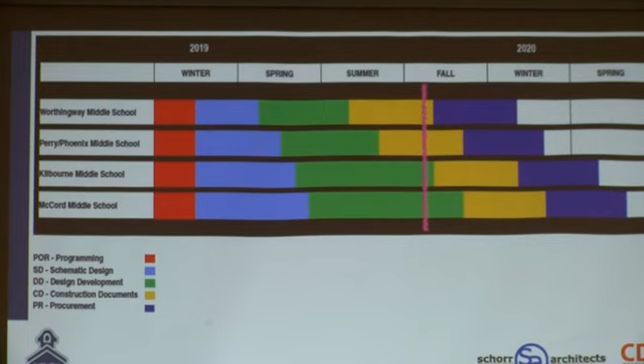We've talked about this slide before. The pink line keeps moving, and that's how things happen. As you see, we are just about to exit the documentation phase for Worthingway and get into starting to procure bid packages. Things that early are coming up would be earth moving, some fencing, some site organization, some structural steel and foundation work. That's all coming, and it's all part of where we are.

Yet we haven't even gotten to the construction document phase yet for Kilbourne and McCord. So we've stretched these 4 schools out because of their size, their scale. Everything will be done in the summer of 2021, but we're going to get them out of the gates separately. I think that's good for where the construction market is now. It's very busy, and it's very hard to get interested bidders, so as we put these out a little bit separately, I think that's a good thing.

I'm going to go backwards tonight with where we have the least amount of progress. That would be McCord, and then end with Worthingway, since we're here tonight and probably where the most questions and the most detail can be shared. So we'll go fast at the beginning, and we'll slow down and get into more details as we get into Perry Phoenix and Worthingway.

So McCord. Northernmost middle school, sits north of Kilbourne High School and south of which elementary? Somebody? Thank you, I knew I'd get it fast. So we have a pretty good site, we have pretty good space. Although when you get into the site plan, you start seeing where underground utilities are, you start seeing what happens to the grades and to drainage as you get into the woods. So we really wanted to use, for the most part, where we had open site.

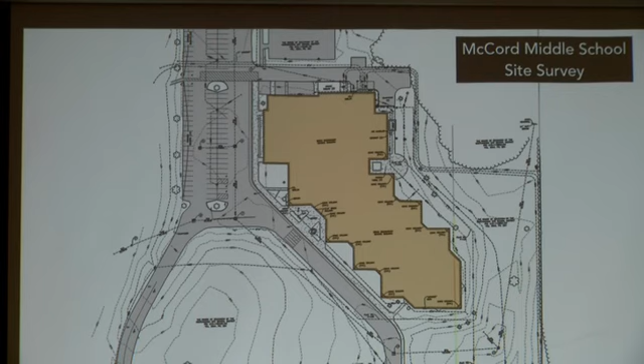Obviously, we have a lot of investment in our entry drive and our drop-off sidewalk, so our opportunities for additions were always in this kind of zone over here. We thought we might push into the woods, not being a big deal, but we found it was a pretty big deal. So we're staying away from the trees, staying in the open space, and trying to solve the geometry of how to put all this additional space onto a school.

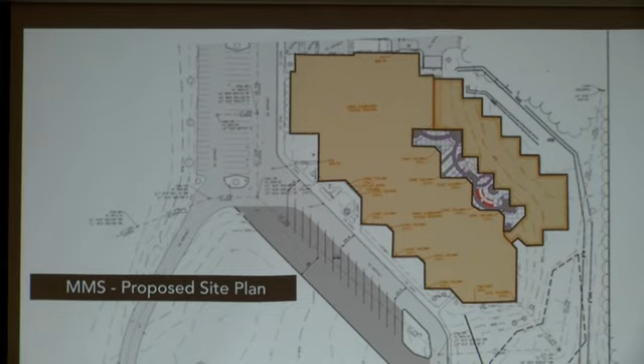So as we got into it, we ended up with a very sawtooth pattern for important reasons, which I'll get into. And we created what is probably the most unique part of this school, a large contained outdoor learning courtyard that's going to be contained by this new addition. As you can see how it sits on the existing school.

We are also looking at site improvements, not necessarily part of the original scope, but something we might be taking alternates on to look at ways to improve site circulation. So here we're showing some angled bus parking, so instead of lining the buses up one-on-one starting here and ending up there by Granby, we have the ability to maybe stack them with a little additional site work and make it more direct access to the school, and possibly give parents a little bit of access to the curb and pick up, which they don't have today.

So here's how the building lays out programmatically. You see a lot of new science labs, a lot of new classrooms. We created this new courtyard, and we displaced music because of our desire and necessity to expand our student dining, and it's part of the beginning of that new addition. There's about a 20,000 square foot addition here, about 12 new classrooms. We're going to take old science labs and grab them back for different kinds of special needs classrooms.

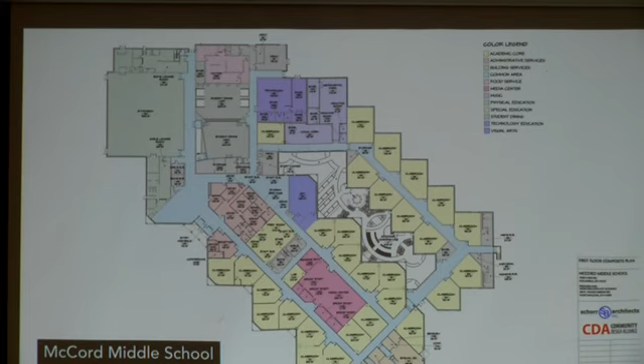We're going to capture all the music space next to the cafeteria and create a much larger dining room because we need it for the number of students we'll be housing. Then we're going to reprogram some music spaces and add a new large group music space here that replaces what we've lost. Here's our new office area that is secure entry.

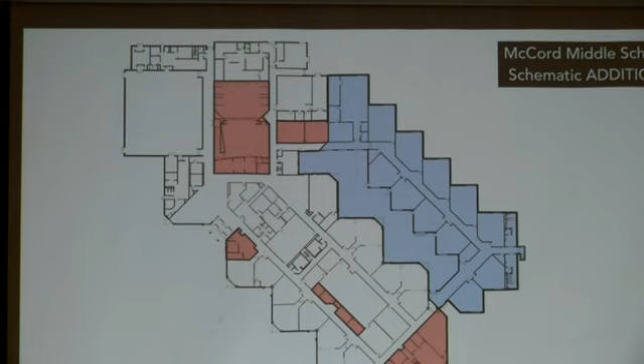People come into the first door of the vestibule, they come straight into the office. They don't get past the second door of the vestibule during school hours. And then we're creating some small group learning collaboration spaces, which this school in particular lacks, and something we're trying to accomplish at most all of the middle school renovations and additions. And then the old science labs at the end of the building, we're going to capture for some new special needs space, which is also lacking. The larger spaces and the reconverted science labs are going to help us do that.

So what's left after we do the basics? This school wasn't very hard of a challenge in terms of the program. It was a fairly hard challenge in terms of where do we put the program, how do we orient this, how do we connect the pathways in the school back to each other. The idea that we would grow on the end of the wing and just make a much longer path to travel from the center core of the building out to the end was non-negotiable.

So the idea of a loop actually came from the superintendent saying, how can we get the traffic patterns to connect to the end of the building, but also connect back to the core of the building? And this is what happened. I was a little nervous about the idea of a courtyard. It's something that has to be maintained, something that has to be designed. But the teachers and students in the school got very excited about the opportunities for outdoor learning and just outdoor space. It's contained, it will be safe, it will not be subject to vandalism because it's completely surrounded by a secure school. And today with camera technology, we can even see something that might arbitrarily happen out there.

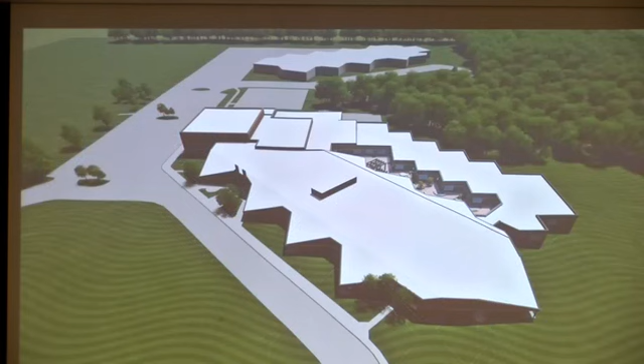So here's how the new massing of the building will look. From the outside, not very exciting, although the sawtooth patterns you got used to seeing are still there. This is where it gets kind of exciting, where the old and new create this zigzag courtyard, with the ability to create teaching stations or teaching areas here, and then something else next.

It's small spaces that connect in a tissue pattern and also connect to classrooms on either side of the courtyard. So at eye level, it's pretty nice. It's not huge, high two-story walls, it's a one-story building, so we have the ability to get a lot of sky view, as you see in this picture.

We have the ability to develop this into anything students and staff can figure out in terms of using it for outdoor education. So it's not free space, but it's very cheap space in that it's not being maintained by mechanical systems or roofs and walls. We're pretty happy about that.

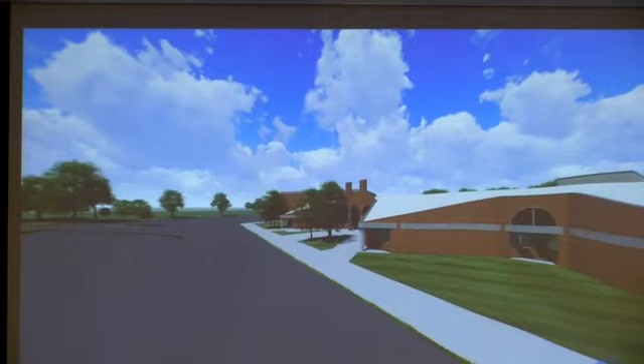This is just a quick video. We have probably one for each building. This one is focusing on the outside, I guess the lack of impact on this side, and then the extent of impact that happens on the back side of the school.

You can see we stayed nicely out of the woods line. We've used what we had. We have minimal utility disruption. We're feeling really good about how this attaches to the back of the core. It does very little to the existing building to cause us to have to change it or upgrade it.

So I like 1, 2, 3, 4, 5, maybe 6 outdoor spaces that could constitute a class, a small group of kids, a one-on-one. All those kinds of things can happen in the same courtyard.

So I'm going to move on to Kilbourne, but if you have questions, absolutely. I guess if you want to ask them now, I'm going to try to keep this going until the end. Go ahead.

Yeah, I think so. It's certainly up to the administration of the school how they allow access. I think it'd be a great place to go for lunch. If it's a nice day outside, it'd be a great place to go for a study hall, even if it's outside. Architecturally, we want to make it flexible. We don't want to dictate to the school how they would decide to operate it, but it's a good question, and it's something that's important, yes.

I just want to confirm my understanding from a previous meeting, because a friend came away from a different meeting with a different understanding. It's true that all of the students 6, 7, and 8 are all going to be mixed together, and there isn't a 6th grader wing.

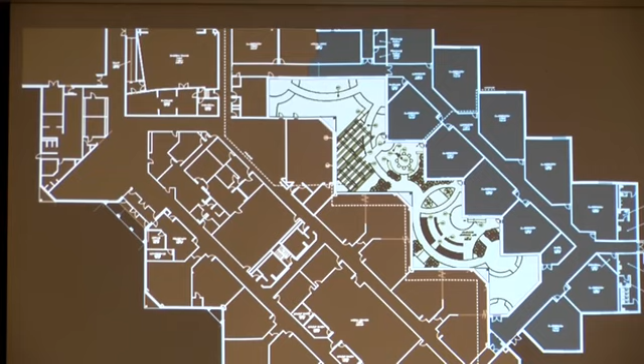But we're hoping that 6th graders learn from 8th graders, and that there's a good environment of diversity in the school to make that happen. And yet still, a principal can figure out how to deliver curriculum however they want. And that's where I find success. So we don't knuckle down and create something that limits the way you might teach and learn in a building.

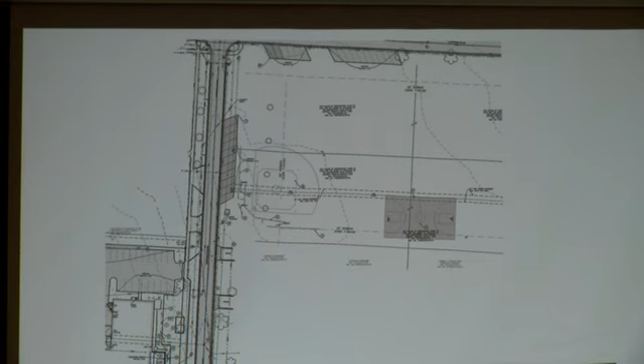So this end of the building is where the parking is. There's some nice drop-off work here that's already been built into Hartford in a pull-off lane. And truly, the only open land that's not have building or parking or the front yard sitting on it is this corner of the building. So we kind of felt like this small addition and improvements to Hartford Park was what the hand we were dealt. And we feel like it's okay.

We're pretty happy with it because we have some opportunities for Hartford Park, and we have really the ability to create a new front secure door for this building without making the front any less important or any less grand the way it is. So we had some programmatic needs.

We needed some classroom space in this building. We were hoping for 4 or 5 classrooms. We've got all 5 plus a small group room. We doubled the size of the student dining, and we've created a new location for the offices, which used to fit inside these 2 little rooms here.

We're going to recapture those as classrooms. That's how they were originally intended to be, is my guess. And we're going to create a new front door and a new operating secure entrance. And again, secure entries at all schools was a must at this end.

So all of our new construction is sitting on that very small piece of ground. The old student dining is about half this width here. And then we're just capturing some internal space relative to that. So this is a pretty simple project, something that can happen over a summer.

This is our new construction. We have to be careful with how we enclose it, how we make it safe, and how we operate school. Currently, there's a lot of traffic that comes from this back door, and there's some traffic that comes in this side door. We're going to have to figure out some options to make that work.

But this is a very simple addition, a much bigger cafeteria and new offices. And the best part about it is, again, you come into a vestibule, you come straight into the office. There's no passing through into the school without coming and doing the thing with the visitor's pass and the badge. And so much more office programming.

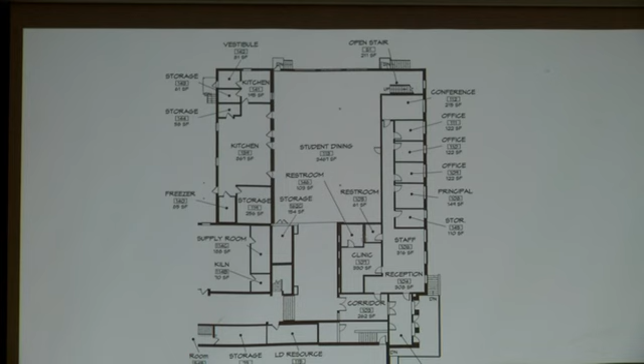And we have a much larger student dining, which based on just feedback in this district, we're trying to turn all the dining spaces into something that's very flexible, very multi-use, feels a lot more like a student commons than a cafeteria. So even this room here, it's going to get 2 times bigger, and it's going to be a lot more than just a dining space. We're trying to do the same thing even at Kilbourne.

So the front offices, nice location for the front door, but very small and very tight. Those are going to become classrooms again. We need those. We're happy about that.

And then in the upper level of the building are 3 more classrooms, a teacher prep room, and some additional support space. Small group restrooms, itinerant offices, those kind of things. So we're just taking the existing hallway out over the top of the new addition and down a corner stair. So very little work on this level as well.

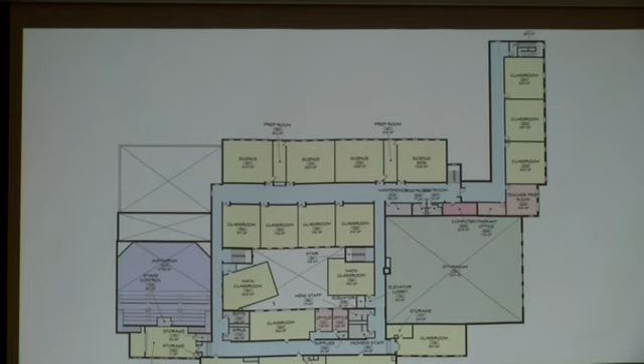As you can see, a little conversion here and the new addition on top of the addition below. So it's a 2-story stacked addition. It couldn't be tighter, it couldn't be more secure in terms of how we're trying to tuck it into this building. It's going to work with the traffic flow, but it also is going to stay out of the way of the school operating while that happens. So here's the upper plan a little closer.

The addition, we started thinking about it being 1-story, but as we needed the classrooms, we started looking at the building with the 2-story gym and the 2-story front, and we decided this is kind of the massing we think we want to reach for.

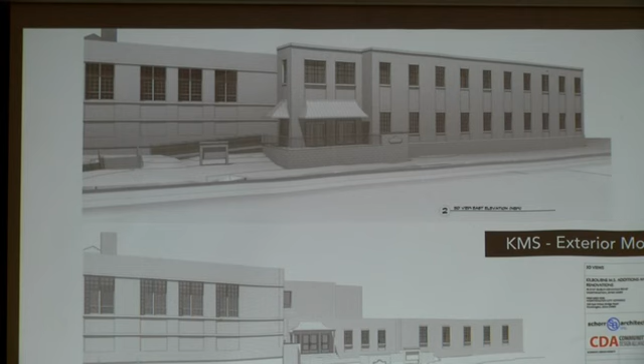We pulled this massing out in sort of this grayscale model, and then we started working with the whole building, because this will have to go to the design review board. We want to make sure we're drawing clues from the building, but we're not copying it to pretend this is a historical addition. We are trying to say this is an addition that works very well with the massing, the window openings, the heights, the stone detailing, all the things that we can pull out of the building that make sense.

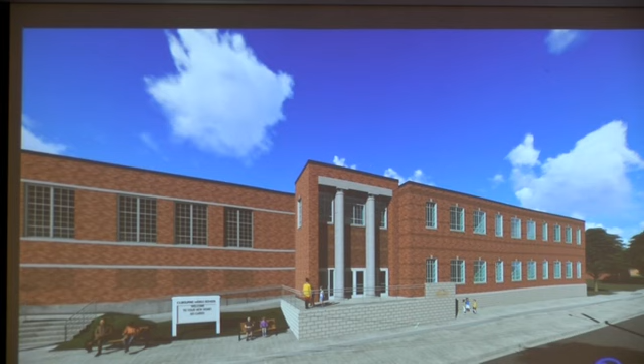And so we think the building gives this sort of importance, it gives it a feeling that the Hartford entrance is important. It's going to be the new front door of the building operationally, but it will never take away anything from the front and the open lawn that we have. It really makes more sense to me when you see it in an animation, because you get the sense that as you move down Worthington and turn on Hartford, that really starts to work. It doesn't take away from this, and this is one of the most beautiful facades of any school I've ever seen.

So are there burning questions right now for Kilbourne?

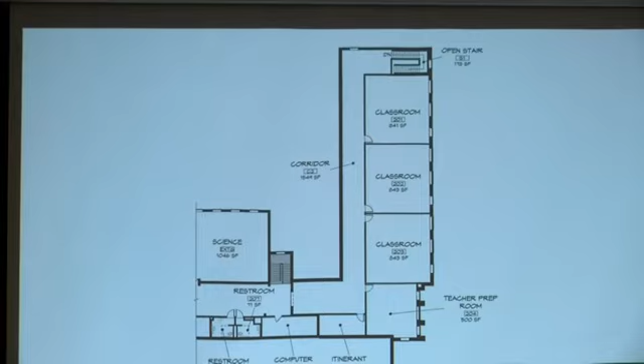Go ahead. So I noticed, maybe it seems like nitpicking, but in the windows you've got those keystones in there, whereas the original building doesn't have it. Yeah, I guess I'd point you to go look at Clinton Elementary in Columbus. My daughter went there for 2 years, and they put on a heck of an addition. You could barely tell it was even new because they blended it so well.

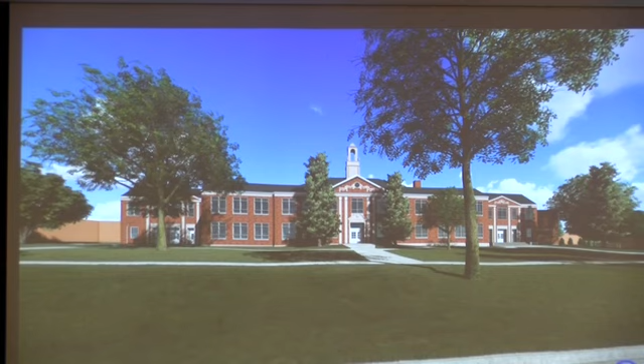Will you guys try to match the design better? I think we'll get some hints from the design review board. But there's a new school of thought that says an addition should look compatible, but not try to hide in the historic context of the old one. So you're supposed to change it up a little, and I'm not sure yet whether that's going to be the case. It's a good observation — those keystones exist in brick in some places in the building, but they don't exist in stone. So if we flip that to stone, are we going to make it too far from being compatible?

It's a great comment, and I'm very anxious to hear what the design review board has to say. We're open. We want to make sure this feels like the right thing, that it fits with this building, but that it isn't just something that happened 100 years ago at the same time as the rest of the building. And it's great that we picked that out, because that's one of the things that is different, and perhaps intentional — Nathan, right? We did it intentionally to try to make a little tiny twist.

I think, from a cost standpoint, keeping the back open for cars makes sense because we're not changing turning radiuses and putting in huge new curb cuts, and keeping Hartford for buses. It might be the way it works out because of economy, not because it's our best possible solution.

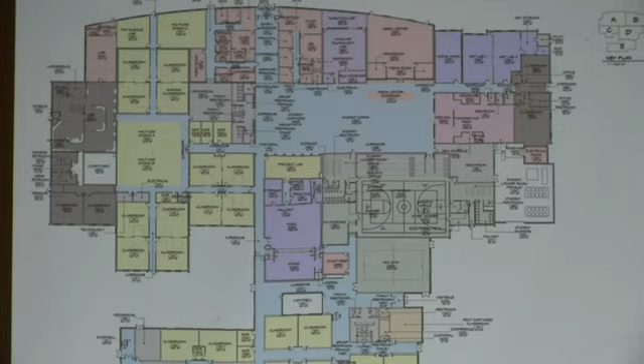So everybody's going to have their own front door and operate independently. Phoenix and Perry will operate with some sharedness, they'll have a shared front door, a shared side door. There'll be things they'll do separately, but a lot of things they're going to share and do together, and there's a lot of upside to that, as well as complexity. So there's our existing site - opportunities with sharing of the park, opportunities with access on all sides with open space, and a much bigger school is planned here.

You can see how we're growing parking, expanding the bus drive, and creating a new school that even creates another one of these outdoor courtyards that, again, at first we were concerned about, and now we're getting more and more excited about. The entry from the outside will be right up near the sidewalk, and this is going to be a school that has a lot more support.

We have the administrative side, the reception, the secure entry, the staff, and the principal on this side. We have student services, clinic, guidance, and those kinds of things on the left side.

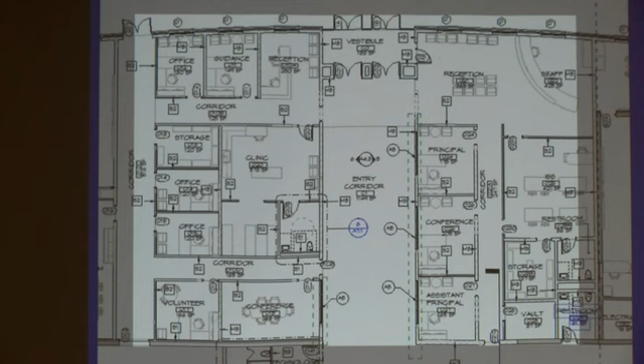As you come down this large corridor, we're going to lift the roof for some daylight, and we're going to unwind all the old administration that's in the center of the school, and we are going to create this giant student commons. It isn't just cafeteria, it isn't just soft seating study space, it isn't just the new media center — it's kind of a blurred line between all of that.

In the old school, there are 10-foot wide corridors that wrap all around that section of the building. So not only when we take the walls down do we get the space that used to be inside the offices, we also get the space that used to define the hallways — that was hundreds and hundreds of square feet, probably thousands.

So this is about a 6,000 square foot student commons, which includes the functions for dining, includes some bleed-out space for reading and studying from the media center, and includes a sort of formal student commons at the entry to the school, right here. So this is a very different space and quite impressive in terms of what happens.

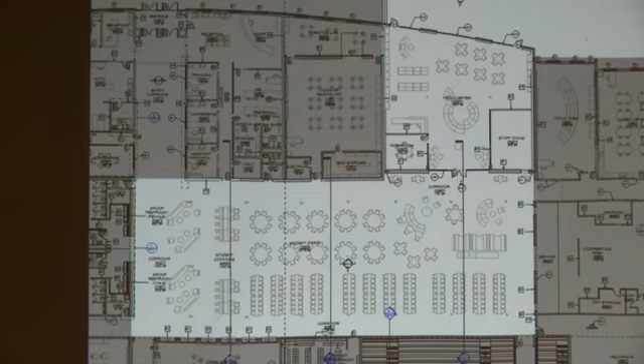The old kitchen is right here, and the old cafeteria was right here. Just those two spaces together, about the size of this room, are going to be the new kitchen in this school — again, much larger, much more ability to serve both schools, both populations, and also do it in the right kind of space.

On the Perry side of things, we drew a lot of our influence from the Worthingway teachers. They were about a month ahead of us. They came up with this idea that classroom teachers will partner, they'll team, they'll have an intervention specialist that will pull kids out of both of their rooms.

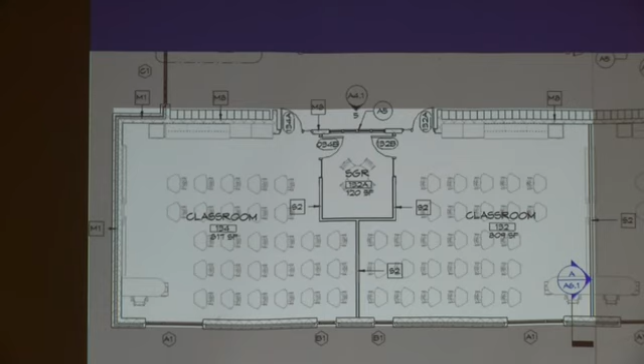They will share this room at other times for common work or small group work. So this idea of 2 classrooms around a small group room was a theme that we established here at Worthingway. As we talked to teachers who potentially will be at Perry, and talking to the teachers at Phoenix, they thought this was a good Perry Middle School solution. So all of our middle schools are going to build off this solution as we move forward.

We had a little different spin on the Phoenix group. They wanted to team in 4 classrooms together. They do a lot of open sharing. They have portable walls — they're a bit old and a bit tired in their school today, but they open them a lot and have actually 2 and 3 classrooms working together in a large space.

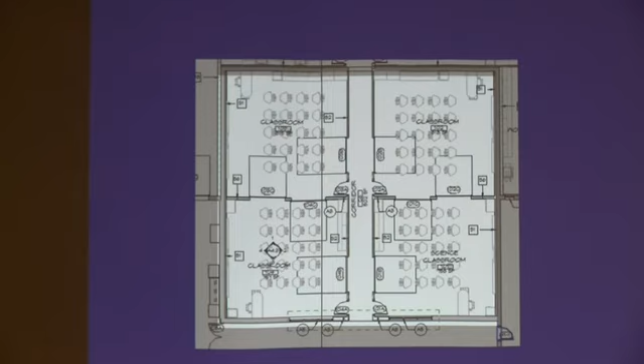We're going to formalize those walls a little better, but we're going to put large garage doors in them. So in a moment's notice, they can close them and have a test, or open them and have some teaming and some concept. This is very much driven by the Phoenix staff and students, who are incredibly successful with where they're headed. So it's a little different kind of classroom, but we have the ability to do that in this school.

This school's going to grow in the same sort of architectural idea. The 2-story addition is going to be on the back, out of the way. This is going to feel wider and way more transparent. My biggest criticism of this school as it sits today is it was built during the energy crisis, and windows were a bad thing — there are very few of them in the whole building.

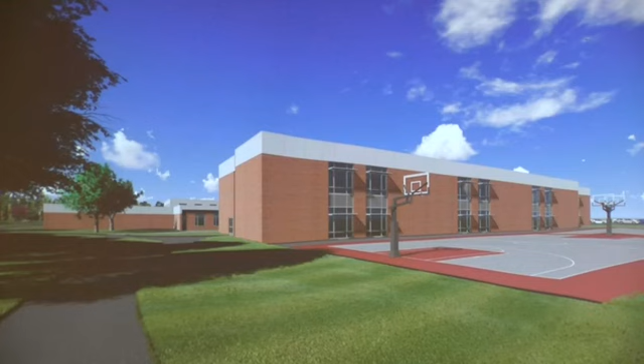We're going to change that with lots of transparency, lots of daylight. Even the internal areas where there's lots of building around them, we're going to get some natural clerestory lighting. So the entry drive will be much wider. All this transparency is going to benefit new art rooms, new media centers, places where you want north light. The 2-story classroom addition will have large windows, lots of natural daylight harvested in those rooms. So we'll have a whole different sense of what classrooms ought to be like in a school from this era.

This idea of an outdoor courtyard for outdoor space, and I'm really excited about this: one side of the courtyard is Perry, the other side is Phoenix. They're going to have opportunities to do things together outside. We're excited about that.

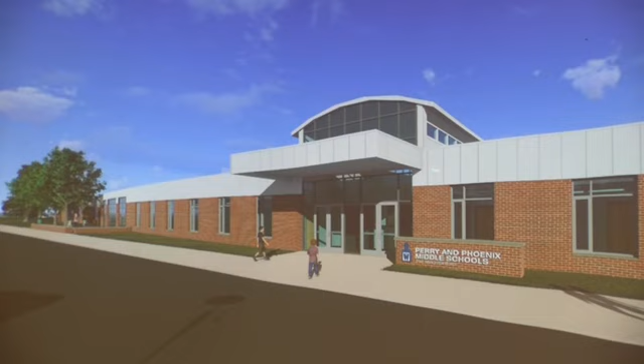New front door, again, importance. We're going to lift it, and we're going to have natural light moving back that large hallway as you come into school. It's going to feel much more grand and formal. Let's look at this quick animation.

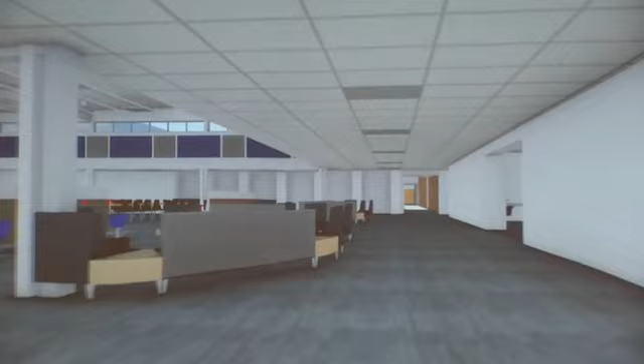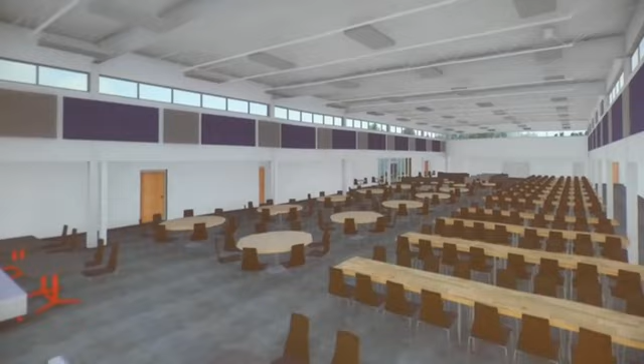In the core of the existing Phoenix building, there are mechanical systems up in these areas where there's never been natural light. We take those out and put in modern mechanical systems, and we have all that space to open this up.

We're just starting to imagine the furniture. We're not even close yet to getting it where we were going to take it, but just the idea of the amount of space—this is the new media center.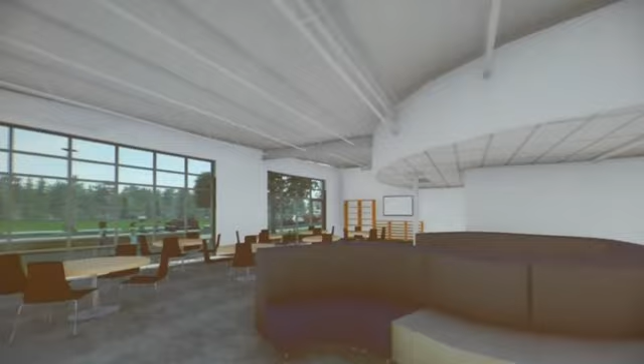This is the old media center, which will become some large group breakout space for the Phoenix students.

I've heard some different things that we're going to clarify. Will there be one gym in this arena or two? We thought we would grow the existing gym and make it as big as an 800 student gym needed to be, but when we started talking about Phoenix and Perry and scheduling, we decided a smaller auxiliary gym was going to be the better solution. So we have a 6,000 square foot existing gym and a 3,500 square foot auxiliary gym—so there'll literally be two gym spaces. The big gym will divide into two, so there'll be three places to have a PE class. So the scheduling for Perry and Phoenix won't be as stressed to try and get those things to happen.

Is that smaller gym more a typical size of an elementary school? It's very much like an elementary gym. One thing we struggle with, and some of the other WRD parents really understand, is indoor sports gym space. To have the opportunity to make a slightly larger second gym might make a really big difference with the scheduling of sports in the winter. We heard that from all the other principals—Nathan has an 8,000 square foot gym here, and he said, how do I get an auxiliary gym?

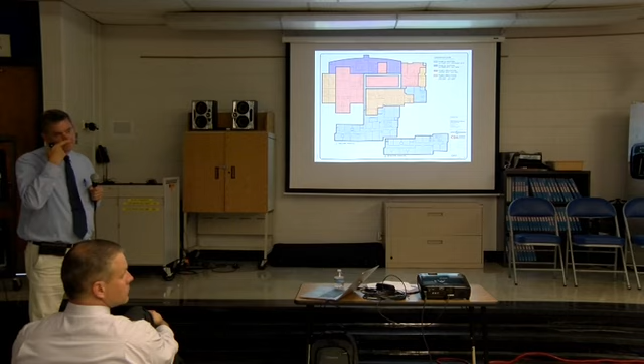Are they factoring in communication systems between all four of these concepts? Absolutely—emergency systems and communication systems all have to be across the whole campus, even outside the building as well.

One minor clarification: so the Perry and Phoenix Middle School students would be eating lunch at the same time in the same space? Not necessarily. We've got this giant space—it might be that they want to do that from a scheduling standpoint, or it might be that Phoenix starts earlier and eats a couple periods earlier than the Perry students.

Again, as the architect, I would hate to tell you that the only way for this building to work is you all have to eat together. That's not necessarily what we're doing here, we'll leave that up to the district. I do think there's going to be a lot of cross traffic - there may be kids doing study hall at this end of the building from Phoenix and kids eating lunch from Perry at the other end. That could be happening, it's a big, open, flexible room. But I don't want to force anything on anybody.

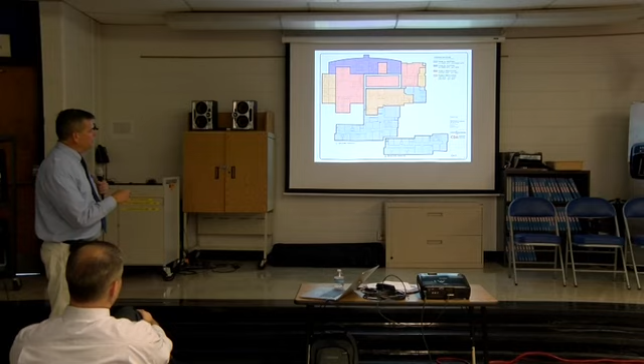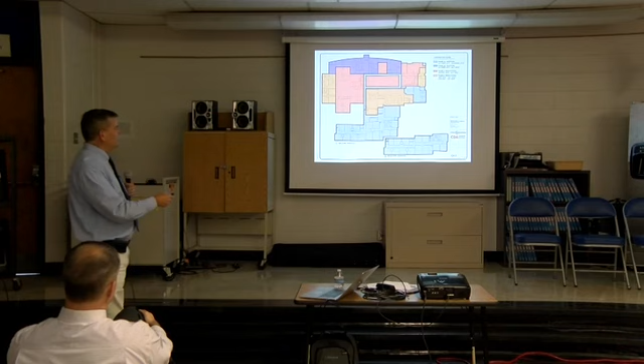This is a quick look at how the construction scheduling and phasing might happen. We're going to get into it deep for this building, but just this slide today. We're going to build the blue, the new Perry, first. The reason is, A, it's the hardest and most lengthy thing to do - we'll have to make construction connections to mechanical systems through the hallways, probably on weekends, breaks, and at night. We're going to leave the red and orange areas that are currently Phoenix and the two academies alone in the first phase. We're not going to bother them.

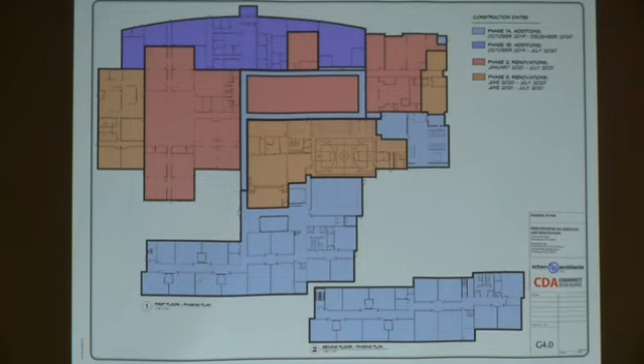Once we have this done, we're also going to put the new space on the front. The thing that this small group of Phoenix students gives us is once we need to get into their space, we're going to have a brand new middle school here that we can move them into for a semester. It's only going to take about 6-8 months out of this red space and the blue space, and we'll be able to make all of the red space like new space. So with this phasing plan and this small population, we have the ability to use our new space temporarily so we can get our old space back and up to new standards. This will be a new building front to back when we're done.

So the old space will be HVAC, electrical, lighting? Yeah, we have to do those kind of upgrades to the red. We think that'll take 6 to 8 months - so a semester plus a summer, and we've got it done.

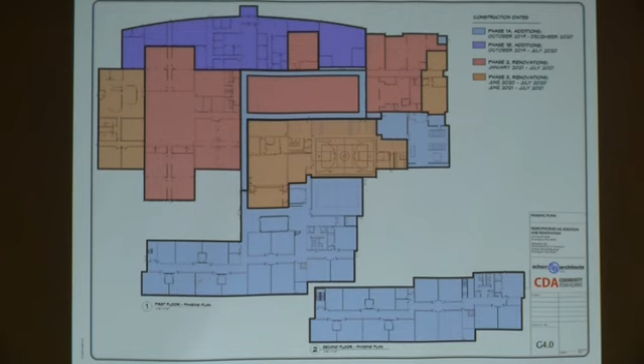So I used about half our time, a little more than half, on the other three. I want to spend a little more time on Worthingway, get into a little more detail. As you can see, there's a lot more worked out because we've been through a lot of phases with landscape architects, kitchen designers, mechanical designers, electrical designers, lighting, window blinds, you name it - those kinds of details have been swept through.

This was always our hardest site. It was always the coolest site because it's a neighborhood school - it has beautiful context, beautiful trees around it. We have this brand new track around it. We always thought we were going to do something that just blew that track out off the site or went one way or the other. In fact, a couple times you drop your pencil and say, why don't we just tear it all down and start over?

Well, we need an active school site to happen all the years that this is going to take. And so where we've got to today, I think, is amazing. We've kept the right amount of the building to make this affordable and to make it work in our scheduling and have a place for kids to be. We've changed the site so dramatically in terms of how we're going to handle traffic, cars and buses coming from different directions, having the ability to keep cars and buses on site instead of around the site. We've stayed away from edges, we've stayed away from retention and drainage areas, we've kept as much green surface as possible. We weren't sure about two stories at the beginning, but now the two stories has made our impervious area added to the school about a wash from what we're tearing down to what we're adding.

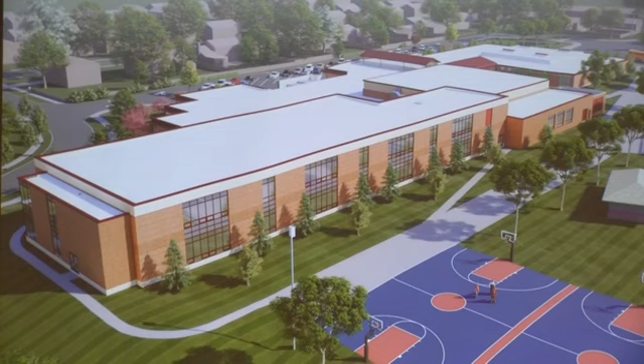This is 20 more classrooms of space. This is going to be one of the larger middle schools, but we feel like we've got it as compact as we can. We've shortened this wing up from our first ideas so there are no roadways and no huge fill quantities at this end of the site. We're going to try to keep this as gradual as possible. It's still steep as you get down to the creek, but it's still pretty natural and close.

The fire department worked with us with a lot of detail to figure out how to get more truck access to more areas of the building. The new code says you have to be within 150 feet with the pumper truck to any point in the building—that's the hose length the pumper trucks carry. So they want to be able to do that, and we have a new fire drive that brings us around the back of the school.

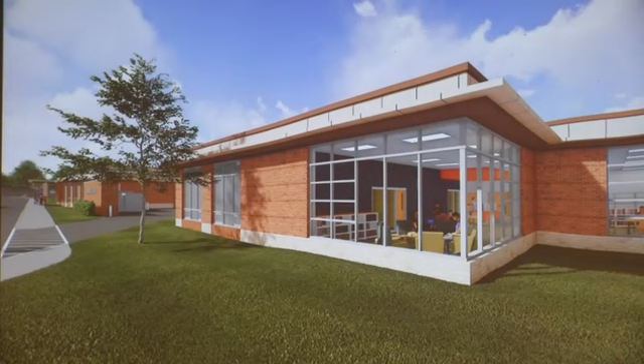It will be mostly pedestrian all the time. When it needs to be a fire lane, emergency lane, that's when it will be. But for the most part, it's going to be kind of a nice outdoor patio to the back of the school. Lots of transparency again.

This is another school from the 50s and 60s. We're going to make that different, but we're going to control that carefully. We're going to talk about that some more.

We've been playing around with some colors and finishes. Obviously we're building off the brick color that's current in the building. We are looking at some sort of mid-century modern colors—a little bit of Frank Lloyd Wright influence here with this color.

We're still playing around with these images, and the beautiful thing about all the work Brian's done in the computer is we can see those images, from paints on the wall to carpet patterns to everything. Even the landscaping you see here is pretty representative of our landscape design, which we have finished as well.

View from the back, again you can see the new volumetric sort of pattern we have here for parking. You can see we've maintained the outdoor courtyard—it's a very cool space here that sort of tailors down into the track area. Brand new concession building that was built. We're replacing some of the outdoor play space that we're taking away with the building, and actually growing that.

At this end of the building, this is the middle of the current classroom wing. Everything you see in the foreground of this picture is the existing entry where the media center and the office is, the current Worthingway. We're going to put a new finished end on this part of the classroom, and we're going to get a much, much better and safer bus drop-off and pickup in and out of the site.

We're very excited about that, and this has turned out pretty great in terms of working with the design of the whole building. Here we can see the amount of traffic we can support and the double directions that we can support that traffic. You can see how we're getting daylight into the school in places where it currently doesn't exist. We're getting a lot of new trees, a pretty extensive new landscaping plan, and we've worked with the city of Worthington to get there.

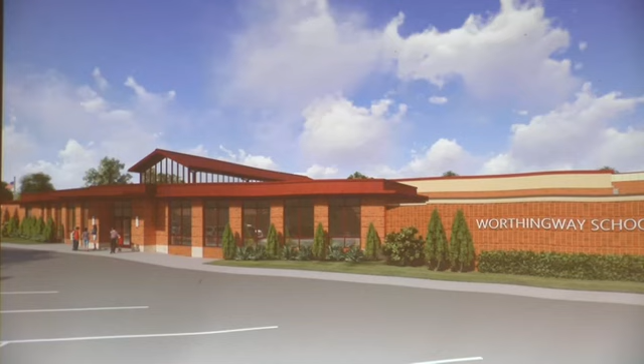New drop-off entry. A little further and further back—this is standing across the street looking at the building.

I think the two-story wing, as it gets farther and farther away, starts to fit right behind the one-story wing without being a lot of additional massing. That was something we were concerned about and were careful to deal with.

Again, some existing trees that are there are going to continue, and some new trees will help buffer this from the edges where we're closest to the street.

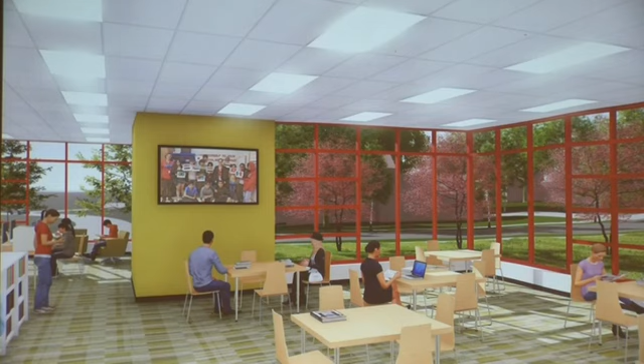Inside, beautiful views for one thing, great daylight. We are going to have mechanical blinds in all these windows to control light from the inside and outside. We'll talk about that more toward the end.

This is where it gets exciting. You come into the cafeteria now, into this courtyard, it's pretty dark. We had this little glass connector between the two sides of the building—this is the back side of that existing connector. When you come into the front door of the new Worthingway Middle School, you're going to see the track.

This is a very open, very daylit student commons. One thing it wants to be is a cafeteria, but it's also going to be everything else for the core, sort of center nucleus of this building. And again, popping up the roof and getting some natural light in here is pretty exciting.

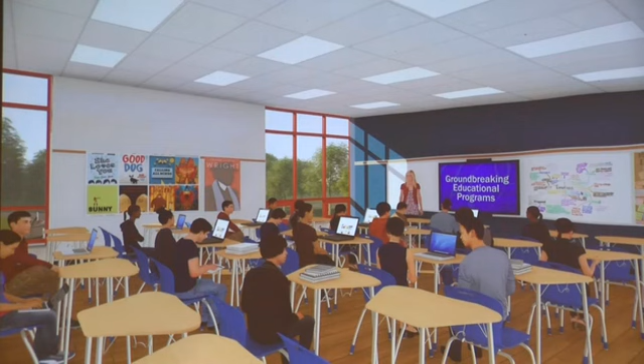Classrooms, again—imagine the difference between the daylight before and after. The new technology we're going to be including. Again, we're playing around with some ideas with furniture.

We're doing some test furniture with the district. They've bought classrooms with the furniture that they're going to test and try, and sort of come up with the ones they think work the best. We'll be buying furniture more than a year from now, so we have the time to do that.

Again, this is to me the best part of the building—how it masses and takes all that new square footage and makes it as tight and snug and compatible with the existing building as possible. And this is a pretty amazing video, given the detail both inside and out.

Cars moving and the track stars running on the track and the flags flying is all Brian just showing off.

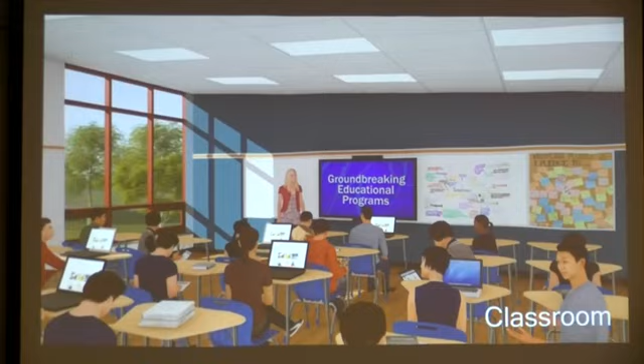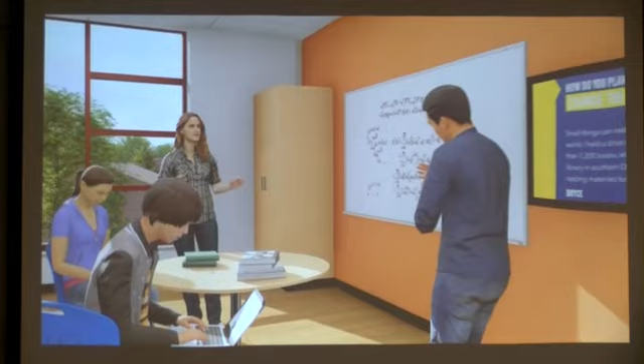Let that finish. But people ask us what's the biggest change from old to new, and I think it's these collaboration spaces. The teachers are the most excited about it, but even the students we talk to were excited about it. When you've got spaces like this that you can break out and work, I think there's better ways to learn, from blended learning, from online learning, but from collaborative learning, I think that's the most exciting.

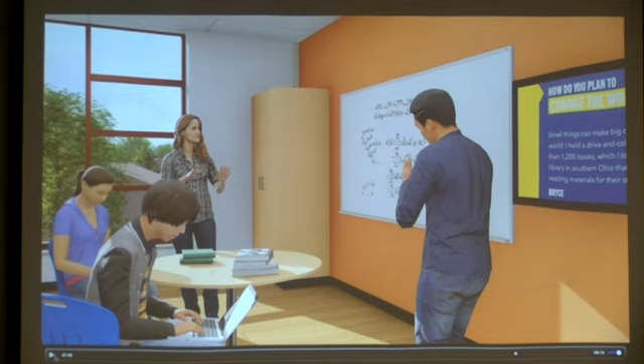And so these kinds of spaces with that natural light and that kind of activity going on, I think is what's going to be most different about the middle schools when we're finished, than they are today.

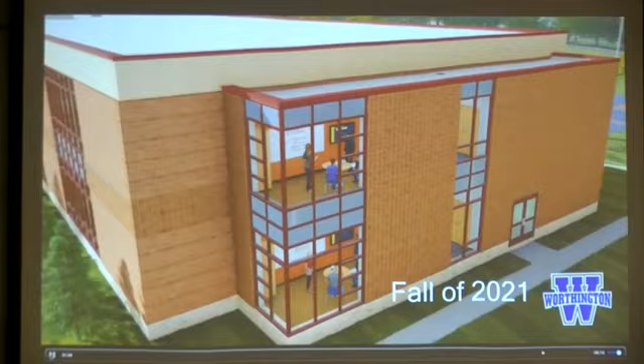So this school is probably the most complicated phasing plan, but it's a very similar strategy. Okay, I'll answer some questions before I get into that.

Go ahead, can you explain the flow to me? Because it's kind of right at the corner. So you have one drive—right now it's a flow-through drive. In the future it kind of looks like there's two, but is there still a pass-through? Let me get to the phasing and I'll be able to show you that on the site plan. I mean, I meant like the driveways. Yeah, that's what I mean on the site plan. Yeah, you will show the site plan?

Yes, I will. So this is just the building plan. The blue is the new construction, the wraparound of the orange, which is the old core wing. So we're going to build that wraparound first, and we'll talk about how it's fenced and how we exit it.

We're going to leave the gym, music room and cafeteria in full service. We won't touch them. We'll be working around the outside of the building, but not getting inside it. We're leaving the entire classroom wing totally operational during this whole first phase.

As we get close to that middle summer, we're going to start working on the kitchen and cafeteria because it's going to change. We're going to raise the level of the floor in here to this level, and expand the size of this out about four times into that blue area.

So we're going to take one semester and work on this kitchen and cafeteria, and we're going to temporarily satellite lunch during that one semester.

Once this is all done, we're going to move Worthingway Middle School into this left side of the building. Then we'll address the right side, phase 4. We're going to tear down the right side and totally renovate the science and math classrooms in that wing.

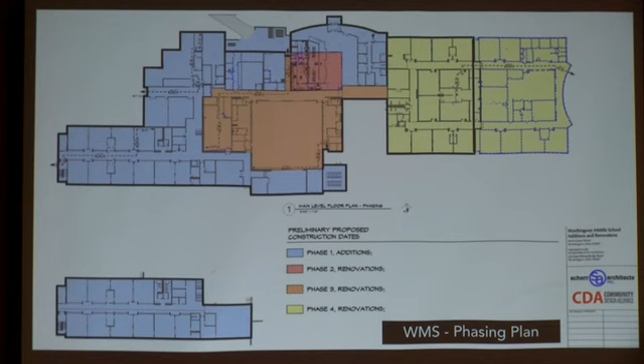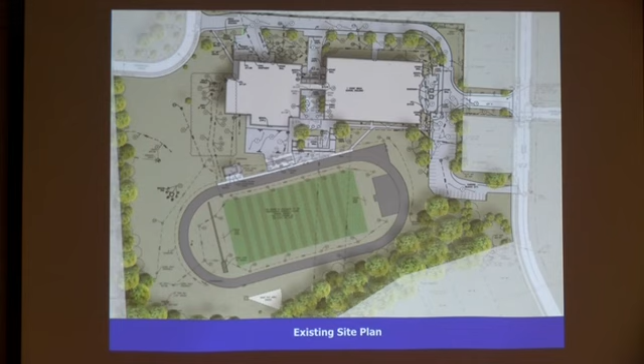After school events, we can put some parking out there in the street. We've got a little bit of staff parking here.

For emergency exits, we'll have a couple emergency exits that go through the fence. But we are going to sort of clamp around the outside of the core wing, but we are not going to touch the inside of the building in this first phase, October through next May.

So the first school year that we're in already, we're going to start some of this in the next month. We're going to have this fence in blue. We're going to have some construction traffic coming from the street in. They will stage and park and do all the things they need to do inside the fence. And Peg, if I'm saying something wrong, jump in there and correct me.

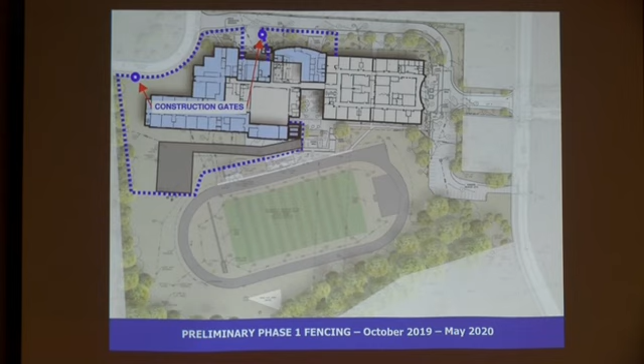And then that next summer, June to December, we're going to pull the dining room and kitchen into our project. We're going to keep the gym and music alone, but we're going to pull dining and kitchen into our new project and get it up to speed and caught up with the brand new cafeteria and dining space that will be out here in the blue.

So from June to December, the fall semester of next year, we're going to have to satellite where we eat and who makes our food. But we're going to figure out how to do that. What is satellite? Satellite means maybe the food is made at Worthington Estates and it's brought down here and served to the kids, because our kitchen will be offline for about 4 months.

Where will they eat it? I mean, will there maybe be the gym? Nathan, have we thought about that? It is the most conflicted and most compromised part of this project, is that kitchen is not where it needs to be, and this dining room is not where it's going to be when it's all said and done. So that red area is the biggest collaboration issue that we have to deal with.

So over the 2 summers, next summer and the following last summer, we'll come in and do tactical improvements on all the gym spaces, the locker rooms, the music rooms. They'll all get renovated, but they're going to happen only during summer. So we will just come in quickly and do the things we need to do to make those spaces renovated. We'll never have them offline from the standpoint of operable school.

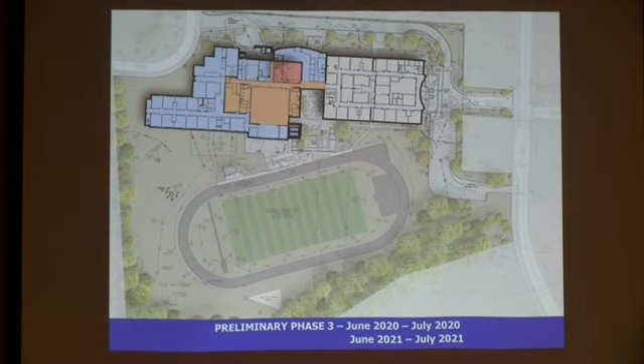And then in July of 20, that's when we can move over here and we can start working on this wing. I'm sorry, I'm missing the summer. In the summer, we're going to fix this entire roadway up here.

This is only going to be during the summer, but we're going to take the entire top of the site, join it in with our construction project here, which is finishing up, and we will be doing all that new driveway work that's in front. And that is just in the summer of 20, from June to August.

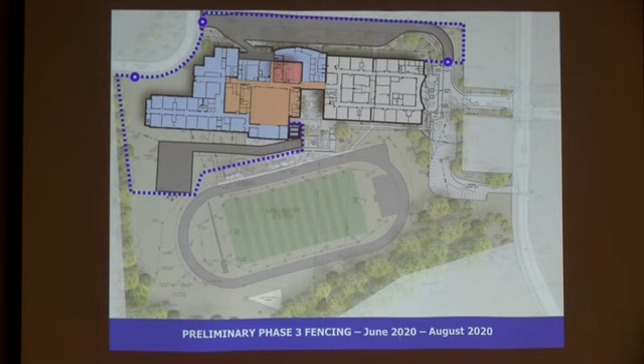Then, when we start school again, we're going to be finishing this up and getting down to the last bit. We're going to go through December 20, and we're going to have an entirely new school on the left side of the site. Everyone that goes to Worthingway School will then be going to school on the orange side.

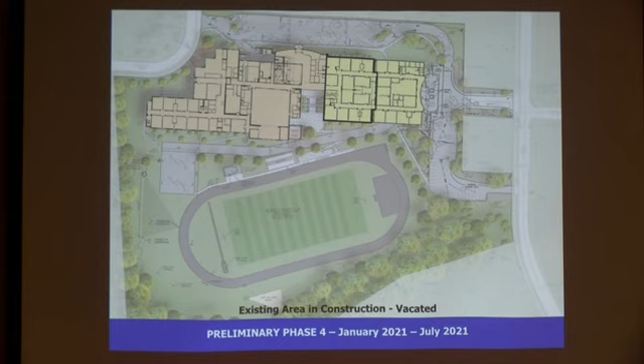But we take the last semester of January to July of 21, and we tear down this wing and we completely renovate science and math. And so there'll be a little bit of, during that fall or that spring semester, there'll be a little fence around that end so we can do a demolition project here and not cause any implications to traffic.

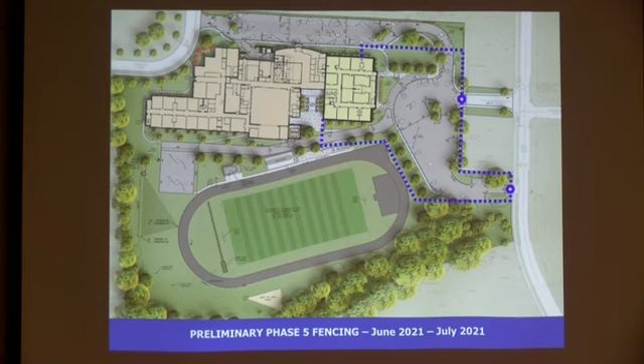The very last summer is the most important one. That's when we do the grand improvement over here. Now that this part of the school is gone, we can do our final bus drive, we can do our final fire drive, we can make all this happen over the summer. And when school opens, we're completely, in the fall of 21, we're complete.

Can you flip back to that last slide real quick? This one? And then one before.

Okay, this is complicated and it's important, so I know you're all scrambling to discern what you're seeing. We're trying to make sure we take some time with this, yes?

My big thing is kids who bike, because I have kids who bike. When you close down that side of the school and the other side, you've got to be sure, because kids will still bike in from that entrance on the right. There'll still be a way to get bikes around and into new bike racks in front of the school before we close this off. This is still going to be the front door of the school for the first half of the construction project, so safely, even though that fence is up, there's still a way to get in.

The fence is only up at the very last 3 months of the project. Right, I understand, but those are months that kids... Right, but this whole side is operational - this whole driveway, all the new bike racks, all the new service drives.

But a child could bike in right on the right side of this field and somehow get to the front without riding in the street. Peggy is listening to you, but yes, we need a sidewalk or some way to identify a bike route that gets to the front of the school from this drive. You're absolutely right - they're taking notes and hearing what you're saying.

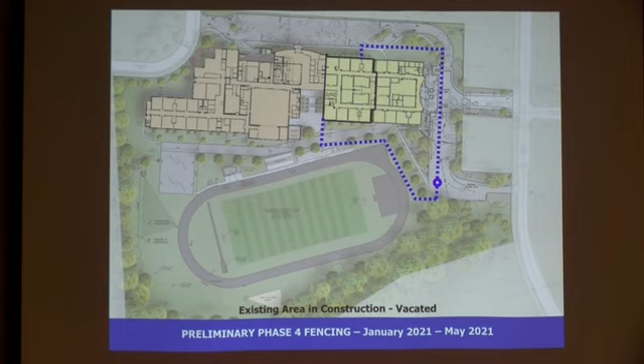Yes sir, the depiction going forward doesn't seem to match up with what was being shown on the prior slide about green space down in the lower right-hand corner, in what you were showing before. The depiction I was talking about was the green space we thought we'd be sitting on top of by having to double up the footprint of this classroom wing. This is going to remain green space.

We talked about driveways and other things coming this way, but when we got done with the fire department, we figured this was the best option. We shortened this to keep it as far away from this slope and this creek as possible. I'm talking about the lower right-hand corner. So this is exactly the same footprint that's there now, and then it'll start to peel off to create this new bus drive.

That really wasn't the way it looked - this triangle is going away in favor of new bus parking. And that is not ideal from the loss of green space, but it is ideal from the safety and handling of buses.

How many more parking spaces are going to be on this site? I'm guessing we're going from about 40 to 80, so we're about doubling the parking. With the majority being up at the other side of the school then? Yes, almost all of it to the north.

This will be parking for after-school events, lots of it, but during the day it is for buses and bus transportation. Those parking spaces can still be there, and I assume staff will probably use them - well, like right now, people park on the grass right there. So is that going to be a parking space?

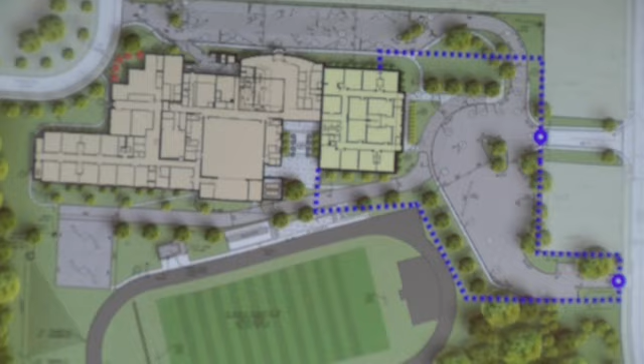I just want to echo the comments on the parking spots along up here. Yeah, they already park in the grass along there, so I think it's an easy fix to push it that way, especially with the flow, since most of the time cars are coming into Larimer or coming this way. It just makes more sense, practically.

I hear you. So I guess I thought the landscaping plan was still being developed. Well, I haven't shown it to you yet. It's there. So this is existing and new trees, and there's a lot of new trees, especially around the perimeter of the building and the perimeter of the new parking areas. We're filling in more trees and putting a lot more buffers around the building. Our landscape designer is here tonight, so you can get up here and talk if you guys are interested.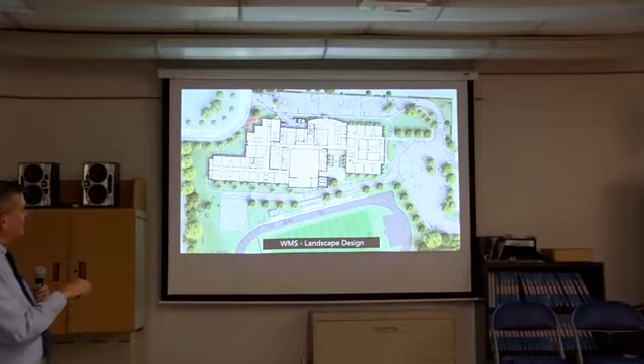I guess I just wanted to see what's going to be retained of the mature shade trees that are there currently. There is a matching pair of huge trees that the fire lane is taking out, and there are 3 large trees in the track that are beautiful that this lane is taking out. Those are the major impact trees. There's some smaller pines and locust trees coming out because of additional footprint, but we're putting way more back than we're taking out. We cannot replace the 3 big trees in terms of their age and size.

The ones like along the east side there, and then around the boulder on the upper right-hand side, are those all? These are all—there's a couple existing ones here that'll stay because we're not changing this footprint, but there's a lot more new ones that'll go in here and fill in.

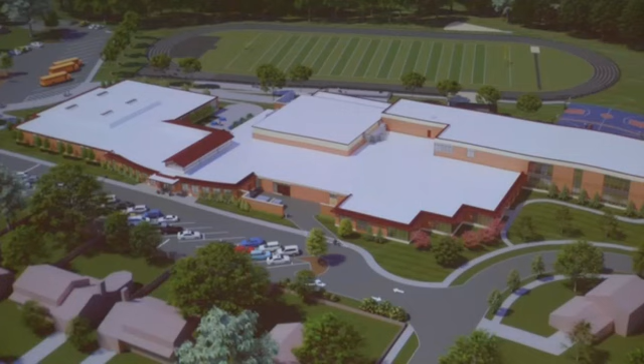So I need to preface a few things here. We're still in design, still working on budgets. There are some things we're showing that may not actually happen yet. We're still in the design process, so we're here to update everybody. We're hoping we can get all that green you see, but we still have a lot of conversations to finish the construction documents. We have a budget to work within, and we're still evolving this. So everything you see today is getting closer to being done, but it is not 100%. We're still working on it, so I want to make sure everybody's aware.

And if you have ideas about landscaping deficiencies that exist today that we can fix, by all means—Cheryl, yes. So I previously brought up some issues.

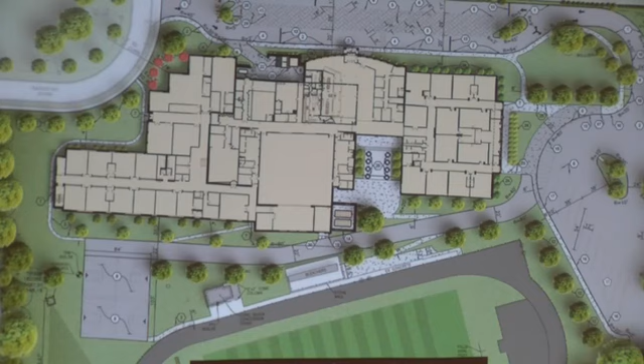About lighting and the scale of this addition, and particularly, there's a lot more glass. And how that is going to be handled in the evening especially, because this sits in the middle of a lot of people. It's a neighborhood, very close to a school. I don't want to see a CVS across the street.

Right, I understand. So one of the things required by Worthington is that we use full cutoff light fixtures outside. That means you see a light fixture like this, you see the ground lit, but you don't see bulbs, you don't see halos, you don't see fixtures—you see just the light. That's a requirement, so our parking lots and our bus lot will have these kind of lights.

Our building, especially the side that faces east, closest to the neighbors, where those large media center room walls are, will have mechanical shades. These shades can go down and up for sun coming into the building, and down and up for light going out of the building. They're programmable based on illumination, programmable based on time schedule, and programmable based on occupancy. Like when people leave the media center, the shades go down. Those things can all happen.

So we plan to have all those windows in that stair step with this kind of pattern, so that besides the trees, and besides the occupancies that will turn the lights off, we will be able to put shades up and down, especially if there's some kind of event at the school at night.

What about the two-story addition? Same thing—there's internal blinds in those windows, and they can be closed. Again, all of the building rooms in this building are occupancy sensored. When I walk out of this cafeteria, if I'm the last person, these lights go off automatically. They're not something I have to remember to turn the switch for.

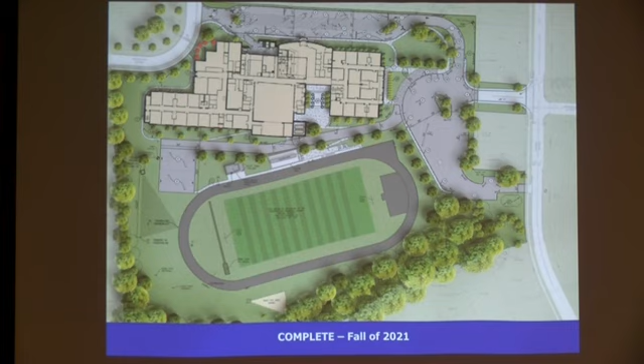There's going to have to be a master schedule of how things happen, and even special days when nothing can happen because it's a testing day or something. So we're going to have to work through that. This is going to be an occupied site. There are going to be days I call 'what were we thinking' days, and they're going to happen. But there also is an end game, which is this brand new school.

Do you anticipate any working evenings or overnight? I think we might have some mechanical connections where somebody's running an electric conduit above the ceiling from one side of the school to the other, but it would be a handful of people, and they would have passes and credentials that would allow them in the building, and they would be using the security system in the building to be here.

What about noise for the neighbors, like jackhammering or? Oh gosh, no, that's not even legal in the city of Worthington. There's a curfew decibel hour. Well, last night... the leaf blowers seemed to go all night. Yeah, I know, but no, there's no way.

What are we going to be seeing in terms of construction fencing when we look out our back windows? A 6-foot high chain link fence, and we put scrim on them.

Scrim, like a tennis court scrim? Basically to keep debris and stuff in, and also to keep various things out. It's an opportunity for advertisements for the school to solicit... no propaganda though.

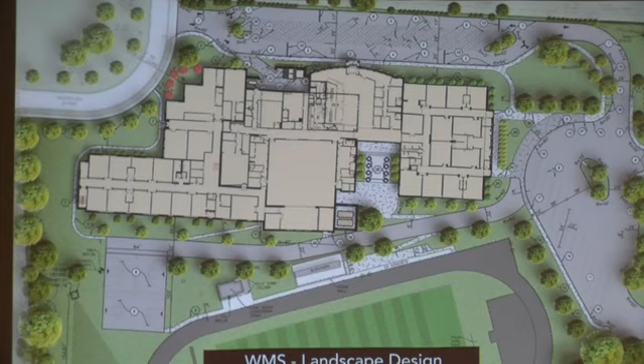Where underground? Under all the parking lots, there's going to be some storage, and then there's going to be some detention ability at the south corner. Which we already have, yeah, but that's got to serve a slower outflow - there's going to be more containment upstream of that detention basin.

We should talk to your engineers before they finalize that stormwater containment plan? Yes. Yeah, I mean, it's a big deal. That's the biggest challenge with the civil here, is stormwater.

Okay, lots of hands, yes, sir.

It can be two-way. I think we're maybe talking about adding a couple feet to it. We want to make it narrow so that people slow way down and negotiate it. If the district decides the only way they want it to be is one way, that's up to them. But I'm saying we could allow cars to come in and out if we wanted to - that's up to the district.

Second part is, what about the home section, visitor section - are we adding bleachers? No, they're tip and roll bleachers that the district would put there.

I think everything was great, and I think our students are gonna be really lucky to have all these brand new buildings. We hope. Yeah, but it is going to be a process. Everyone in this room has to bear over the next 18 months.

Thank you. I just want to make a few comments. I think overall the design is great, it looks wonderful. I think you had two options on your storefront and cornice color - I think the red is more striking and it looks nicer.

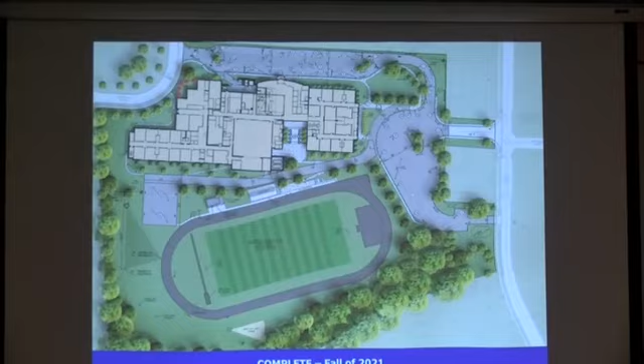Personally, though, I think the entry canopy is a little sad looking. It seems a little under scale, a little kind of like it's just thrown on there. So I think maybe that could use a little more attention.

I think it works really well from the inside scale, but it's a big, giant building from the outside - I guess the canopy piece. But we gotta obviously keep it a little bit modest so the buses don't clip it and trucks don't clip it.

And the other thing I noticed in your flyover was you had a rooftop unit to the gym - if you look at the visibility of that, it's screened, so if you can't see it now, you won't see it. We're cutting the addition way back.

There are giant mammoth units on this roof today that you can see as you come down Larimer. Those will be gone. We're getting rid of all those.

The two that tuck on either side of the gym are existing units which we're not replacing. We're adding air conditioning to them but leaving them in place. Walk around the building today and you can see them from the back, but I don't think you'll ever see them from the front or the west side.

So you're adding air to the gym? Air conditioning to the gym. Awesome. Nathan said if you do that, I'll be quiet about everything else.

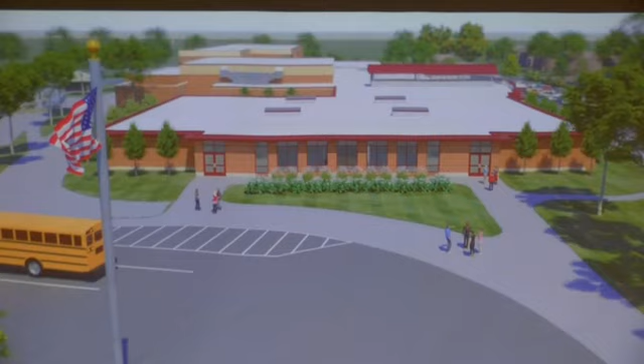I'm curious about the connector between the two parking lots. I understand its function now because the buses have to come through that way, but now that the buses can turn around the other lot, why is that connector needed?

Because we deal with a lot of through traffic coming through there, people speeding, often going the wrong way when it's a one-way currently. Larimer is still the most public, high volume street that can get to this site, and I wouldn't want to send everybody winding around Worthington Estates just to get to the parking lot if I didn't have to. There's got to be some amount of flow allowed that doesn't have to circle up north and come back.

Yeah, it would be great if the school would consider speed bumps there. Oh yeah, because it's dangerous at times.

Can you show us where the tornado siren is? Right there? No, I can show you actually on the model. What did you ask?

Tornado siren. So we're about 20 feet past the tornado siren, and that's staying where it is now, physically. See that first tier, that first flat spot, that's right here, and then it starts to go down. We're going to have to extend that flat spot out about another 10 or 11 feet, and then go back down.

What about going back to the other slide where you can see the aerial? That tornado siren, is it right there? Yeah, that's where it is.

So the basketball courts are up against the tornado siren. They're sitting in that dark grass area right there.

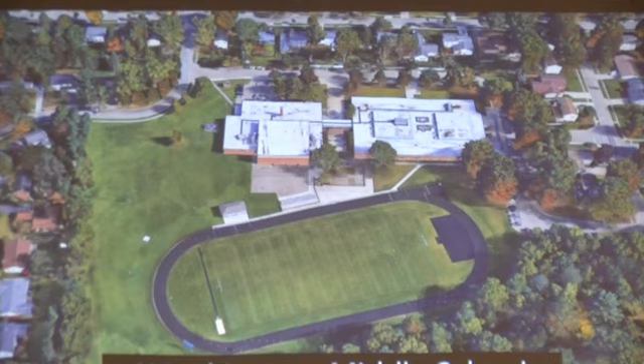Exposing everybody that's in there? Are there security issues so that you don't have to worry about an active shooter getting inside? They can take care of everything from outside.

The windows all have internal blinds, and with a quarter turn they shut. So in an active shooter situation, every teacher knows, and a lot of students know, you turn the blinds so that there's no visibility. Now, the classroom windows aren't ballistic glass.

The entrance around the office and where people come in, that's ballistic glass, and that's going to be hardened to some degree. But yes, if somebody takes a rifle and shoots in a classroom, they're going to penetrate the glass.

But they aren't going to see what's in there because teachers are going to be able to turn the blinds and make the building secure. A lockdown situation means all the blinds go dark.

And 3 panes of glass, but still high-powered rifles could get through. The district has some security film on some entrances already. We're going to have all of our glass entrances with that security film. We have yet to decide on some of the lower glass areas - we may put security film on them as well, we just haven't gotten there.

Good stuff. So you had some great sized windows with the new addition - are you going to increase the size of windows with the existing building? Because I know the windows here are kind of narrow. We really wanted to, but we got into cost issues, so I don't know if it's still an alternate. We'll still have these size windows in the math classrooms over here. The science labs will have skylights, but we're still looking at the same glazing in the 4 classrooms to the north and 4 classrooms to the south. So they'll have daylight, it's not a lot, you're right - it's smaller windows.